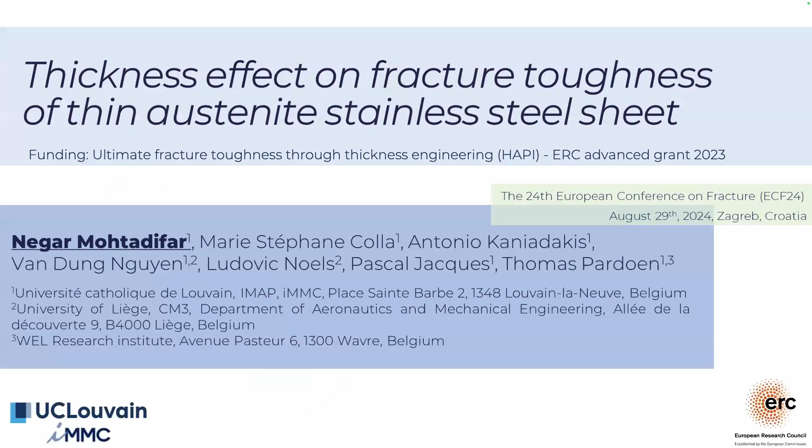So in thin plates, and when I say thin plate, I mean when the size of the plastic zone in the crack front is larger than the plate thickness, the fracture toughness is not actually intrinsic, and it is changing with thickness. As you can see in this figure, in materials with large strain hardening exponents, as you decrease the thickness, the fracture toughness starts to increase. It reaches a peak value at a specific thickness, and then it starts to decrease.

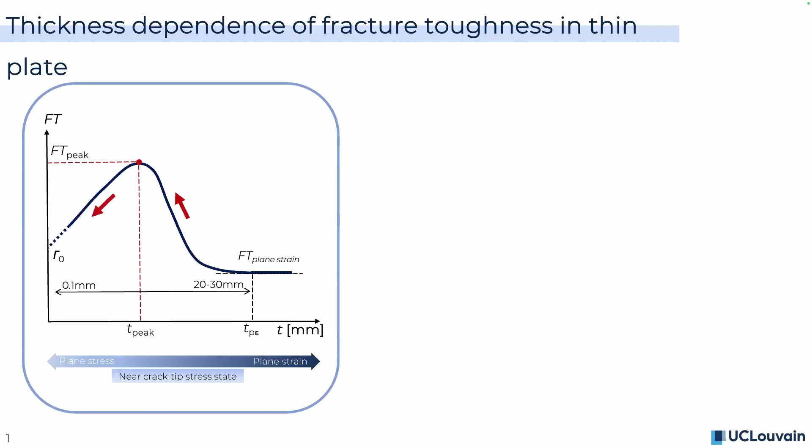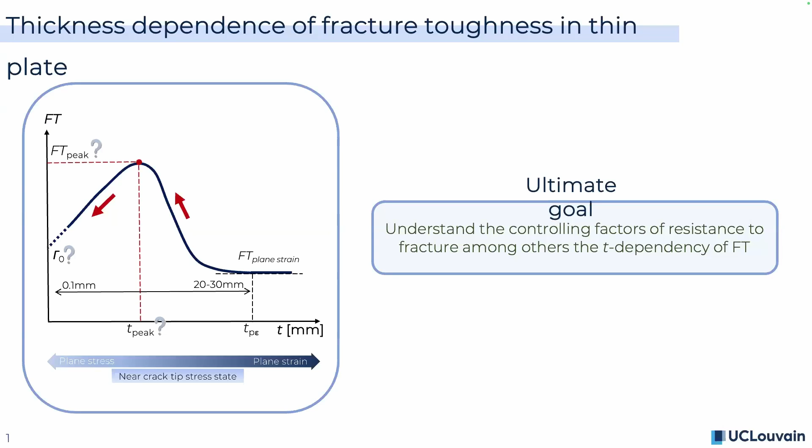But we don't know what is controlling the peak value, the corresponding thickness, and also the plane stress fracture toughness. And so in the team that I'm working with, me and my colleagues are trying to find what are the controlling factors of resistance to fracture, including thickness.

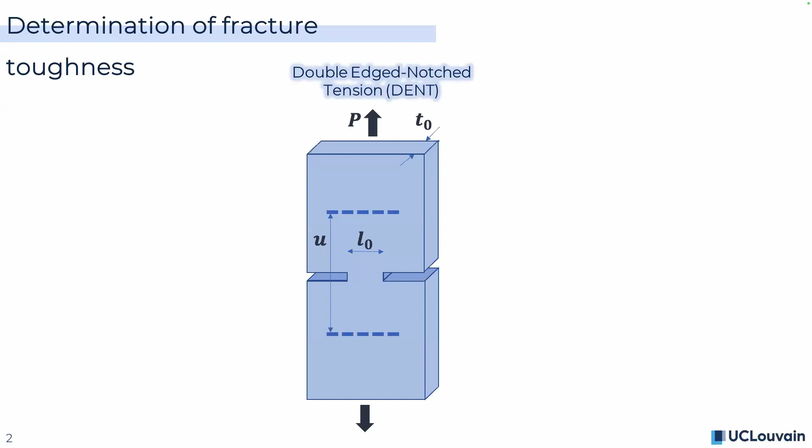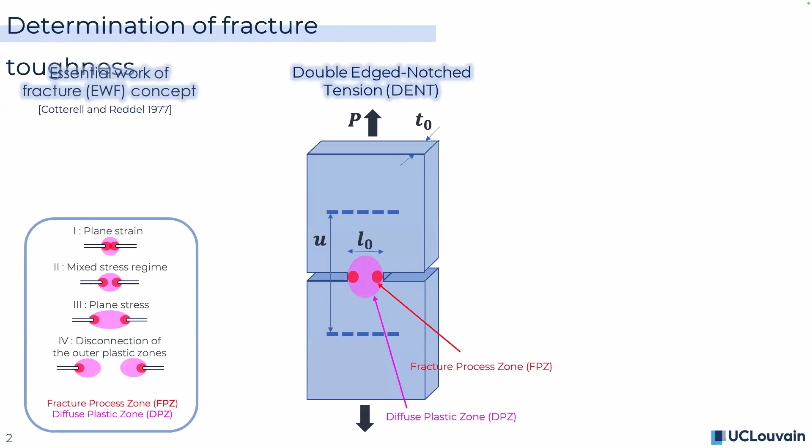So in order to determine the fracture toughness, we chose double-edge notch tension specimens. And these specimens allow you to benefit from the essential work of fracture concepts, which allows the separation of the work spent in the diffuse plastic zone from the work of necking and damage in the fracture process zone. To briefly explain it for the people who are not familiar with it, depending on the ligament size between the two notches of the specimen, you can have different regimes in which we are interested in essential work of fracture. We are interested in the plane stress one.

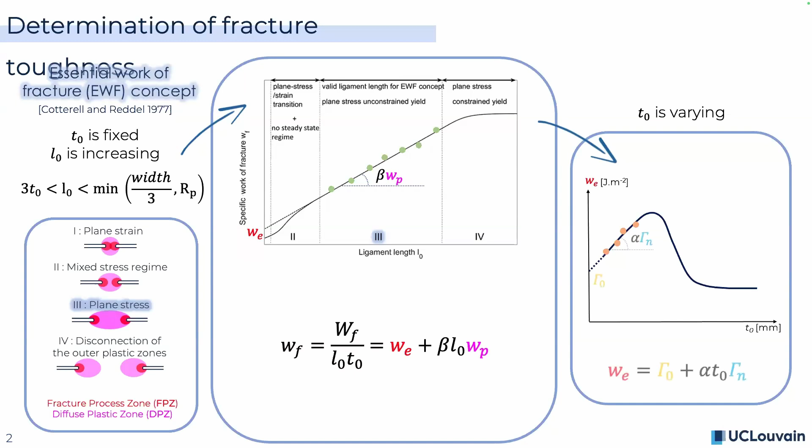So if you design similar specimens with the constant thickness, and increase the ligament length within a valid range, and then determine the specific work of fracture and plot it against the ligament length, do a linear regression, you can separate the essential work of fracture from the work spent in the plastic zone. And if you repeat this for different thicknesses of your specimens, and again, plot your essential work of fractures against the thicknesses, do another linear regression, you can extract the pure work of damage from the work of necking indicated by gamma n.

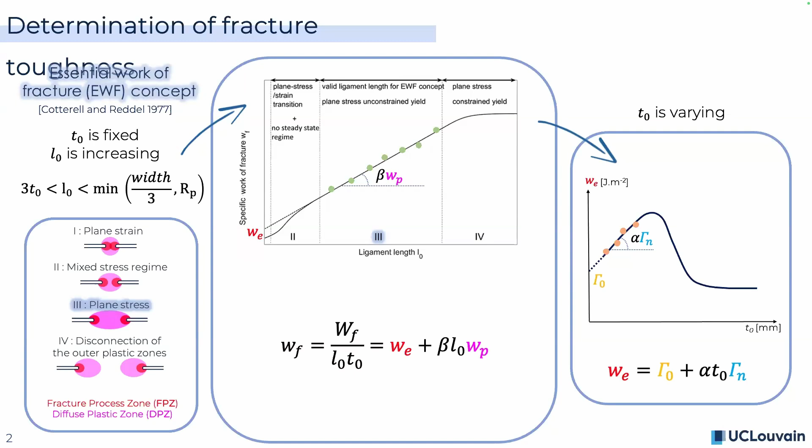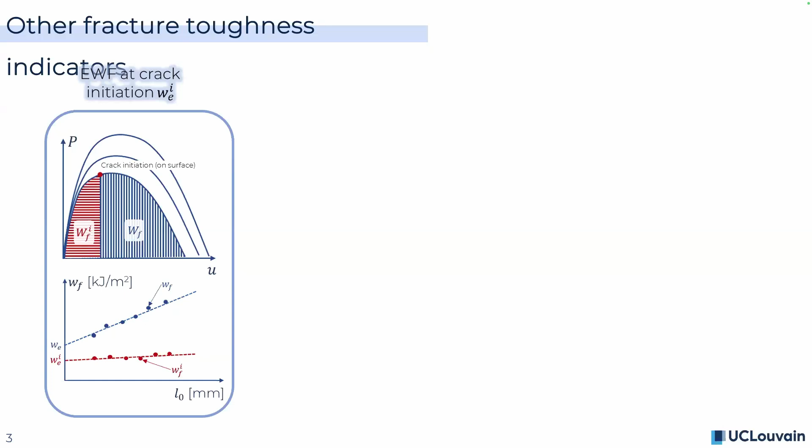We also extracted other fracture toughness indicators, including the essential work of fracture at crack initiation. And it is similar to the essential work of fracture method. We also measured the critical crack tip opening displacement, we followed the methodology proposed in 2000. And we measured it with two different methods, polishing and tomography based. And this was done on interrupted tests at different advancements of the crack. And we also calculated the J integral value by the formulation proposed by Jim Rice.

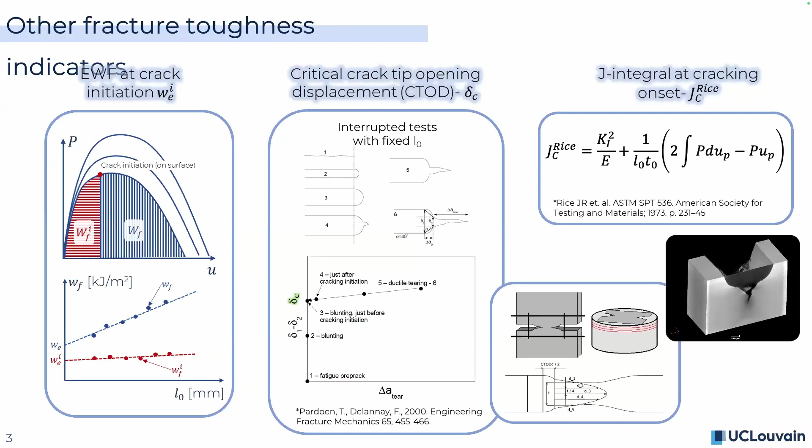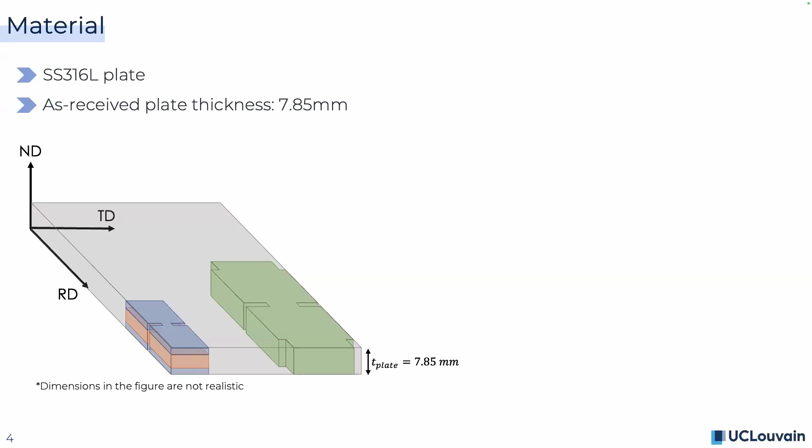So the material that we were dealing with is stainless steel 316L. It has a large strain hardening exponent. We had a plate of thickness 7.85. We extracted our DENT specimens along the rolling direction with the dimensions that you can see in the picture, with 3 different thicknesses, 1.5, 3.7, and 7.85.

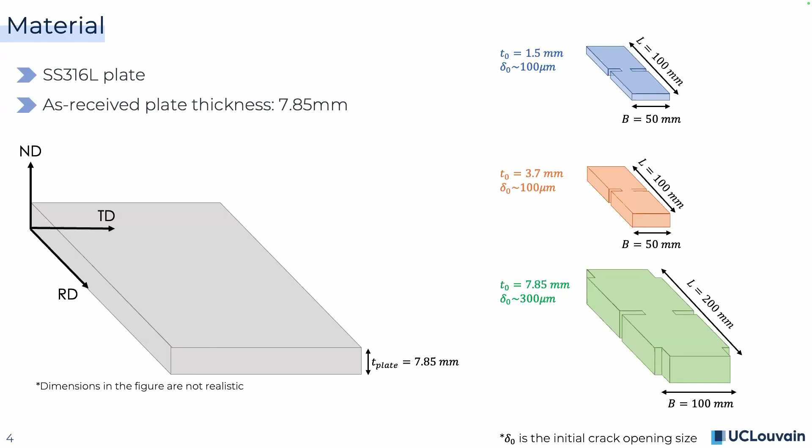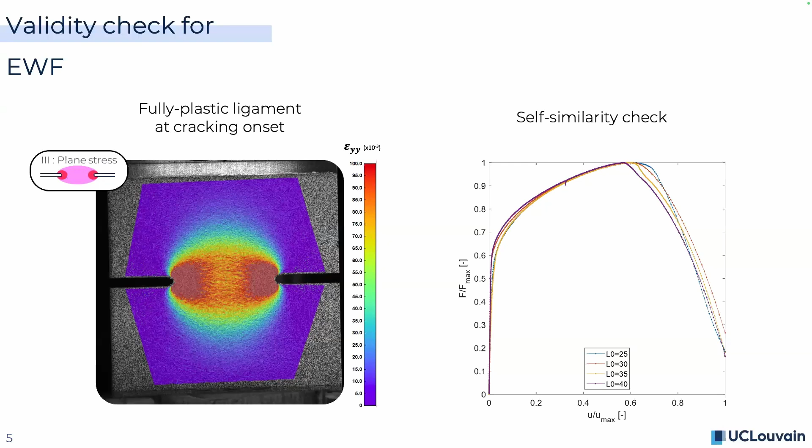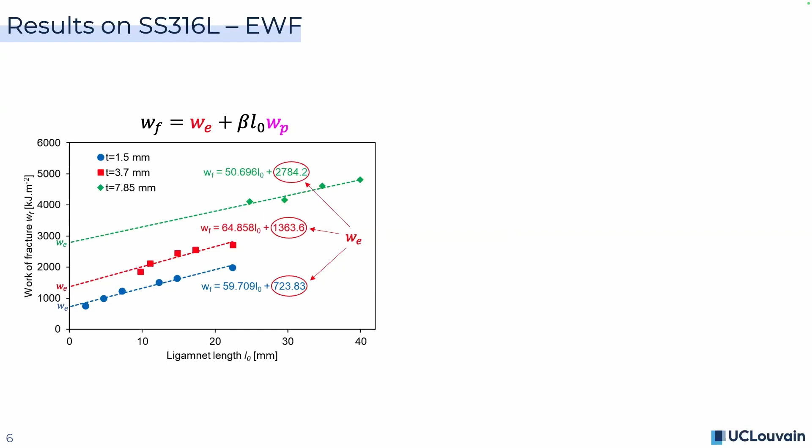And so after testing, it was important to verify that the ligament lengths that we chose were valid for the essential work of fracture. So first, we make sure that at the initiation of the crack, the ligament length is fully plastified. And secondly, for each of the thickness, if we plot the normalized force displacement curves, you can superimpose them. It means if they superimpose, that the mechanisms in play are similar for the specimens. So we check this. And finally, based on the methodology that I explained, we extracted the essential work of fracture for different thicknesses and plotted them against the thickness.

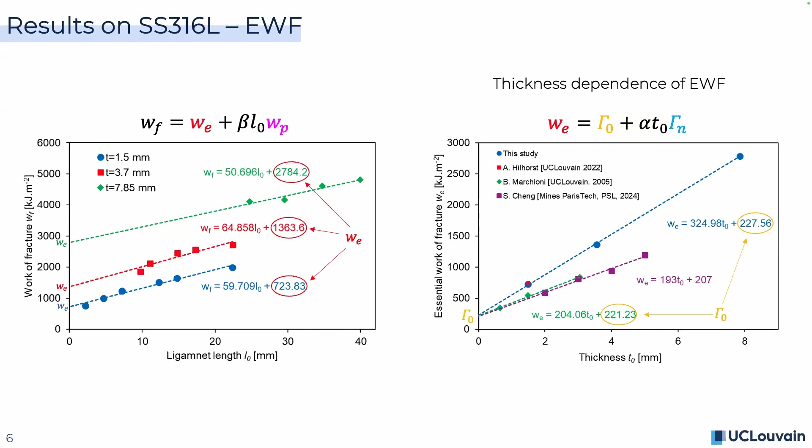As you can see in the curve indicated in blue, we obtained the plane stress essential work of fracture, and comparing it to the results in the literature, they were quite similar. However, the work of necking was different. We did the same thing for the EWF initiation. And finally, we compared the EWF with EWF initiation and the J integral values. And as you can see, the J Rice values are close to the initiation values of essential work of fracture. And the difference that you see between the essential work of fracture and the J values reflects the extra energy dissipated due to the crack propagation.

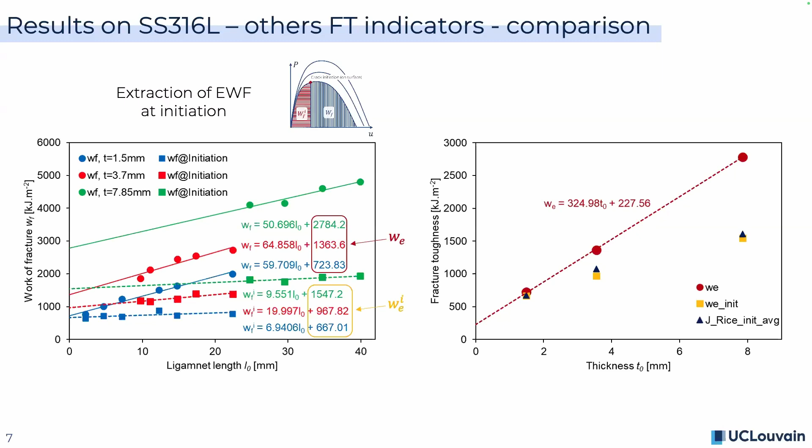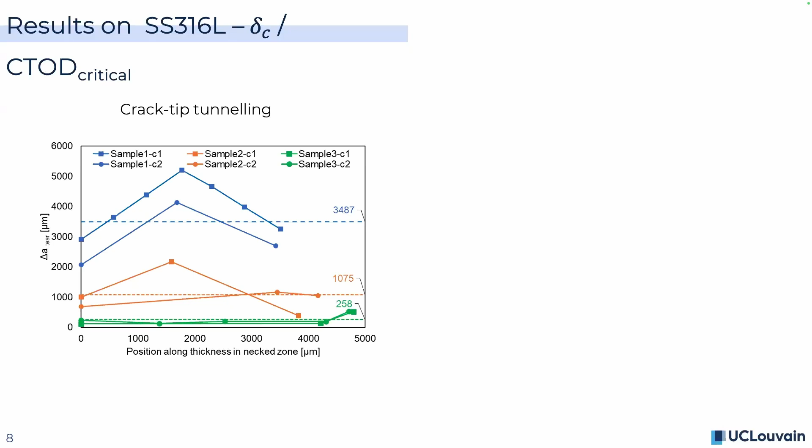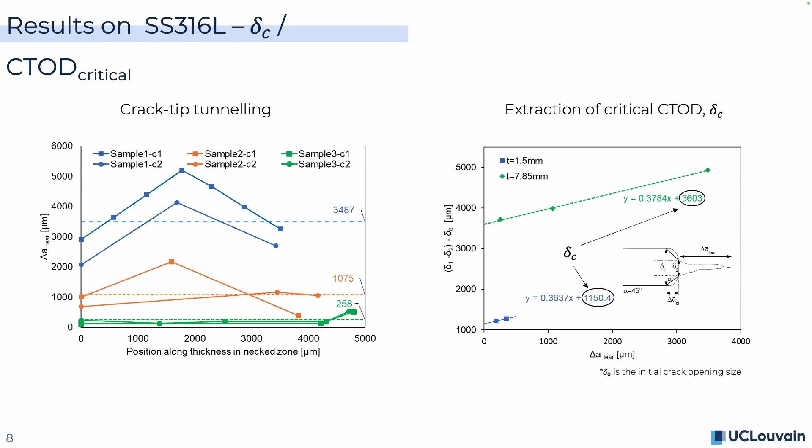Finally, we did interrupted tests to measure the critical CTOD. First, we observed the crack tunneling as the crack advanced. You can see the tearing versus the positioning along the thickness, and you can see a clear tunneling. And also this initiation-based fracture toughness indicator showed that fracture toughness is indeed thickness dependent.

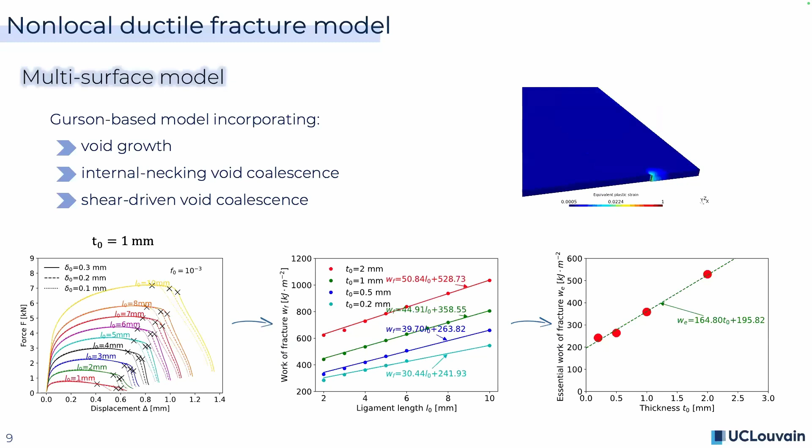And finally, I would like to mention that in the group that I'm working with, parallel to my experimental work, there is a modeling team who have developed a non-local ductile fracture model. And they have conducted simulations on DENT specimens with different ligament lengths, and they were able to extract the essential work of fracture and show the thickness dependency of it.

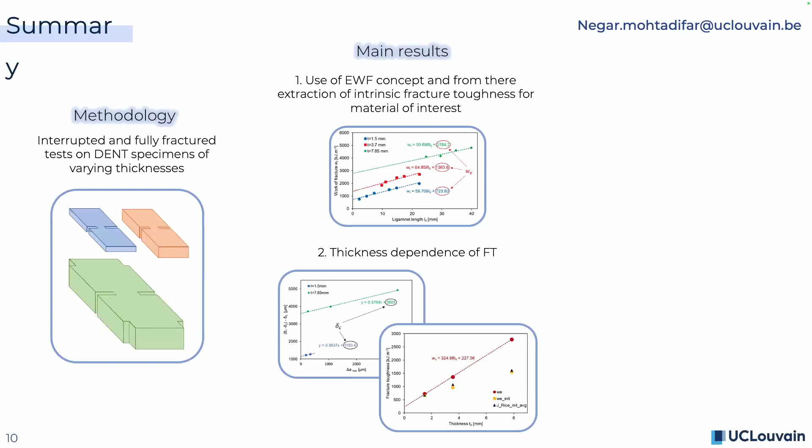And with this, I would like to summarize my talk. We conducted fully fractured and interrupted DENT specimen experiments, and we were able to extract different fracture toughness indicators and show that indeed fracture toughness is thickness dependent.

And for the future work, we are planning to have a better look at the necking and the crack tip and compare it to the semi-analytical models in the literature. And also, again, I would like to connect my experiments to the FE models and gain a better understanding of the controlling parameters. This would bring my talk to an end.